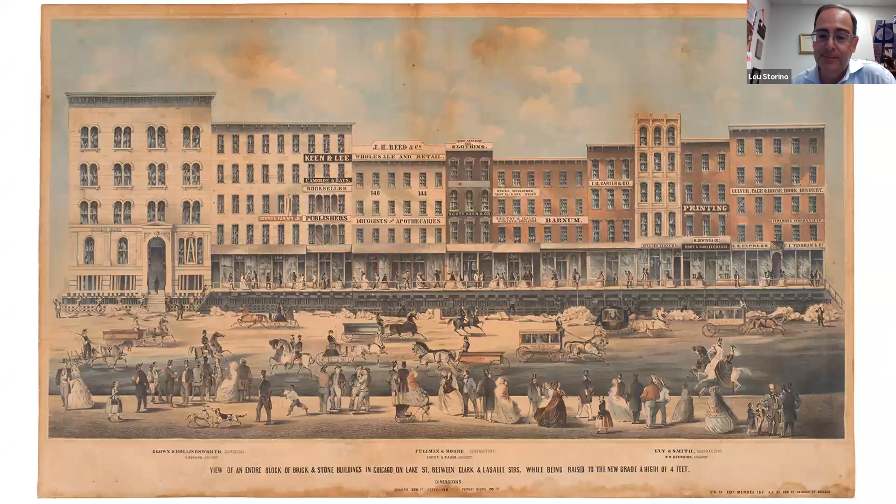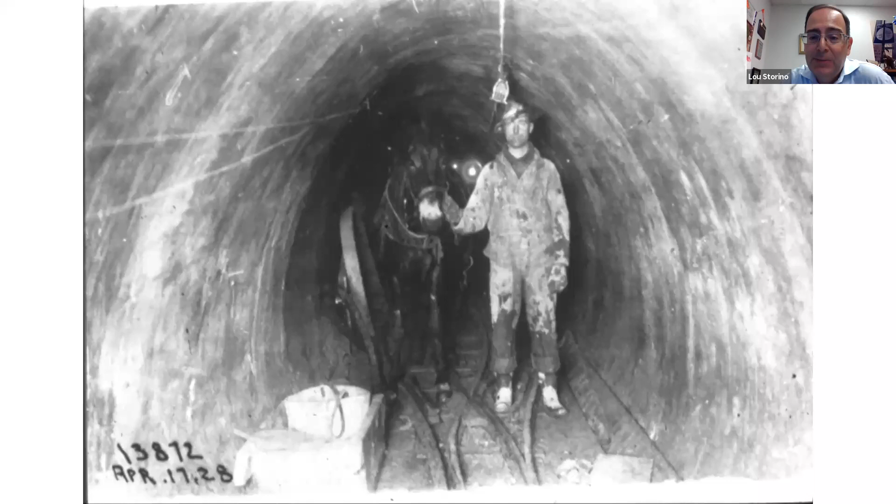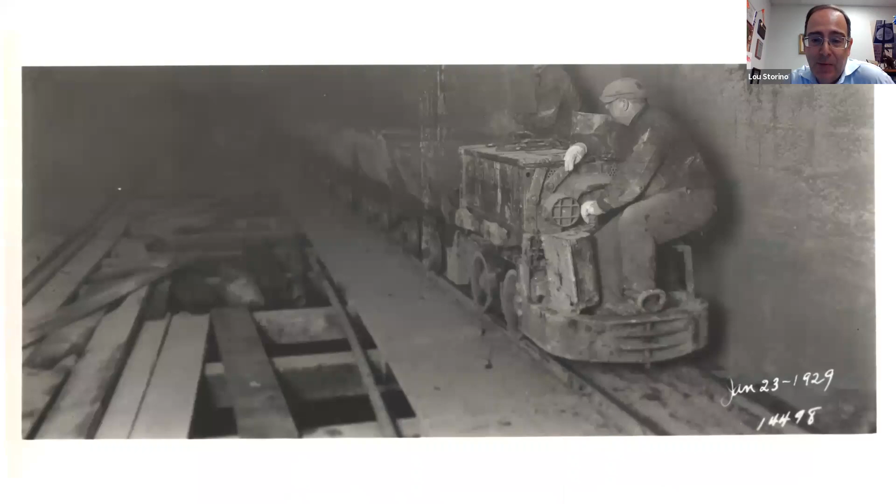Material was typically hauled in and out of sewers under construction by mule in 1928. If the sewers were larger in size, we show here battery operated rail used to remove construction debris. This slide takes us back to 1929.

Due to the nature of the soil, much of which was Chicago blue clay, the procedure required excavation by hand and the installation of ground support. The distance was only what could be mined out and lined with concrete within 24 hours. This involved setting reinforcement, placing the concrete invert, and pouring the walls and arch. A few days later, grouting began to fill any voids, and finally a thin concrete finish layer was placed on the invert.

And many of these sewers are still in useful service today. Sewer asset management is becoming more and more important in recent years due to economic considerations, since infrastructure maintenance and rehabilitation represent major investments in sewer systems.

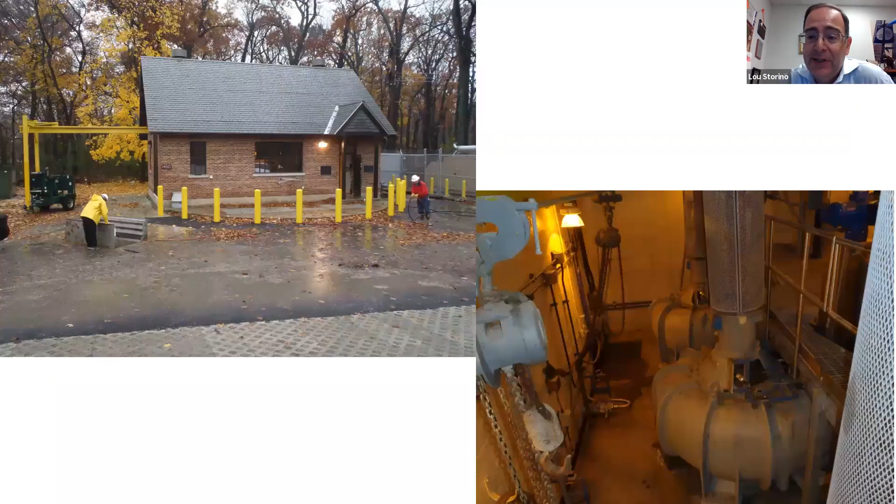As the water reclamation facilities were built in the area in the 1930s, intermediary lift stations were built along the collection system to lift wastewater, in some cases upwards of 40 feet or more, so that the wastewater could continue to flow by gravity to these new treatment plants. This photo shows the Upper Des Plaines pumping station in River Forest, Illinois, designed to blend in with the surrounding neighborhood and placed in service in 1938, and it continues to operate today. The station houses 3 centrifugal pumps with 38 total dynamic head and 350 horsepower motors.

Most water and wastewater facilities in the US are designed and built with large pumps, drives, motors, and other equipment that operate 24 hours a day. Energy costs can represent 25 to 30% of the total operation cost for wastewater and water utilities. Operational improvements allow for some of the greatest opportunities to improve energy efficiency at water and wastewater facilities. Energy efficiency can help lower the costs for water and wastewater utilities while improving the performance and service.

These sewer systems shown here in older communities in the Chicago area, and really across the United States, were built as combined sewers, carrying both sewage and stormwater runoff. Newer communities are built with separate sanitary and storm sewers. As these interceptors were placed into service, connections to the local waterways were left in place and structures built to allow for combined sewer overflow.

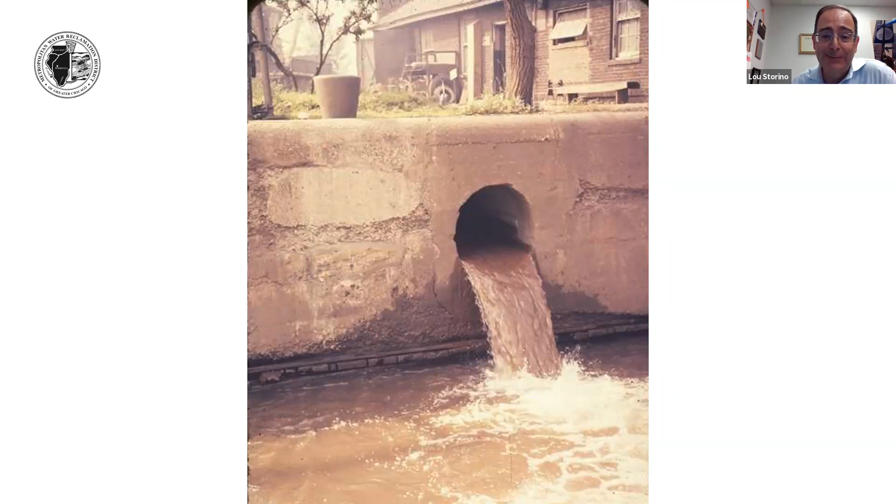During storm events, wet weather flow from local combined sewer systems is diverted into the district's tunnel system, also known as TARP. When the capacity of TARP is reached, combined sewage may discharge into local waterways, and this is something we really want to try and minimize.

We also have odors emanating from sewers that can be an issue on two fronts. One, it can be a public nuisance, and it can be indicative of high hydrogen sulfide, which may prematurely degrade the sewer system. This screenshot illustrates our district's tracking system, a GIS-based odor complaint tracking system. The small circles represent catch basins in the collection system, while the large brown circles represent odor complaints. There's a circle I've highlighted with the number 3 in it, signifying that in this particular location we have seen 3 odor complaints since 2014.

These odor complaints are investigated to determine the cause. Necessary remedy measures that are taken can include charcoal filters in the catch basin, cleaning the sewer system, or adding a deodorizing agent to the catch basin. If odors are persistent long-term, other measures are available to remedy the cause, such as introducing chemicals upstream.

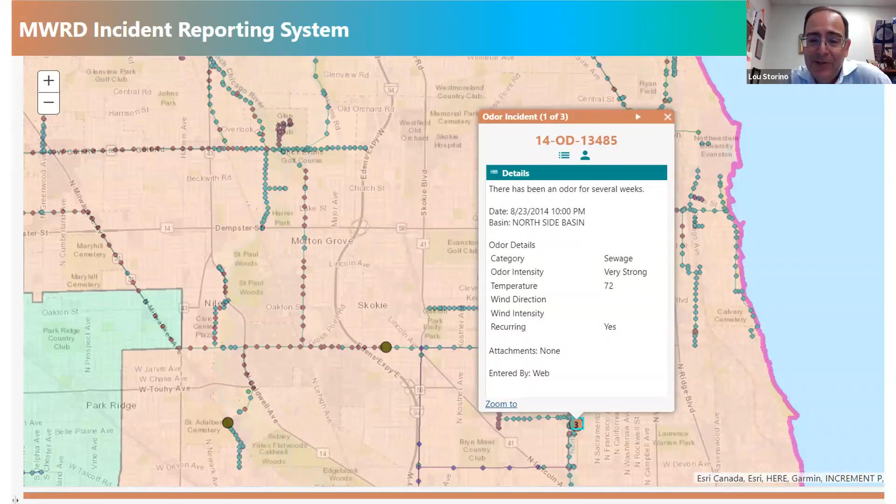Finally, on to our last slide. The innovators at today's webinar will paint a picture of how the future could look for sewer asset managers, and showcase some examples that have successfully helped Danish sewer asset managers avoid cost increases and extend the lifetime of these assets. The 4 key focus areas for today are digitalization of sewer systems and data-driven overview, predictive maintenance, pumps and efficient cleaning of the sewer system, and energy efficiency.

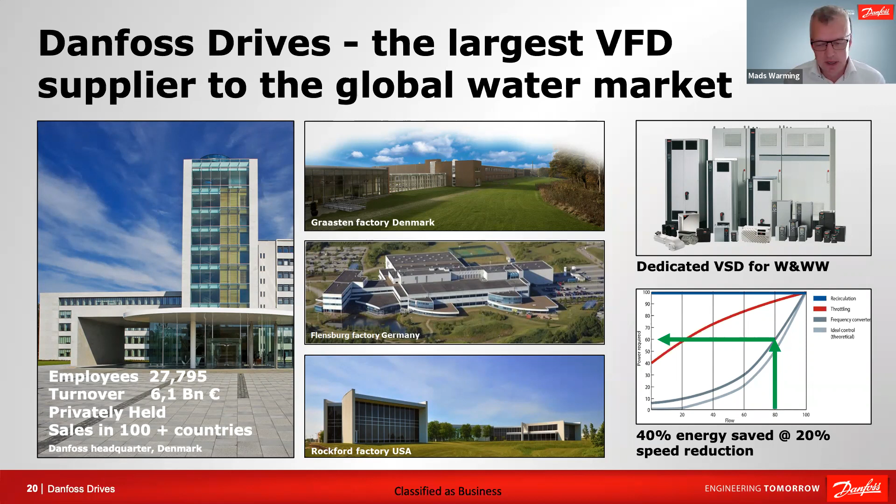In fact, there are new regulations set up from Brussels which push the authorities to find solutions so that we get less sewage overflow, and at the same time, as we all know, we get more and more heavy rain. So that's quite problematic, and quite a lot of money is being thrown into it.

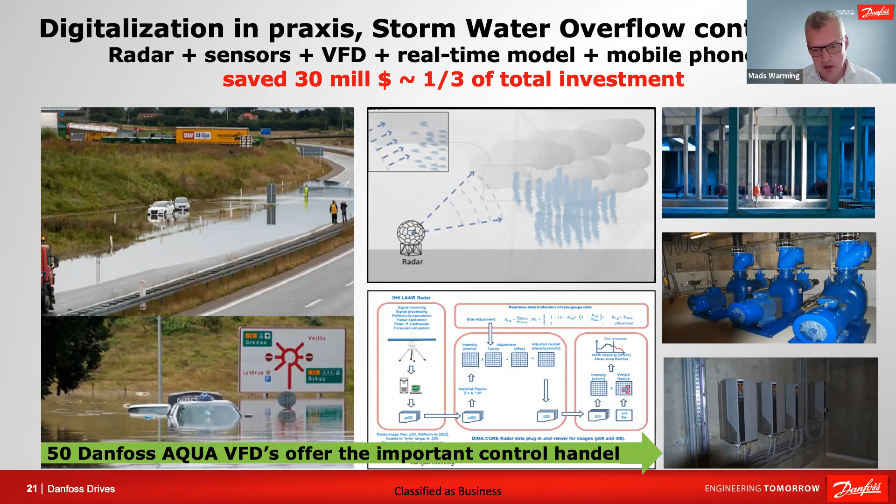There are 50 variable speed drives installed in part of the city to cope with that. The philosophy is that there will be a variable speed drive on every motor, whether in the network or in the reservoirs.

Coming to variable speed drives and how they can be used for more than just regulating speed, one thing we've introduced to the marketplace is edge computing. Instead of having a cloud connection, we don't need one here. We do all the calculations down in the drive itself.

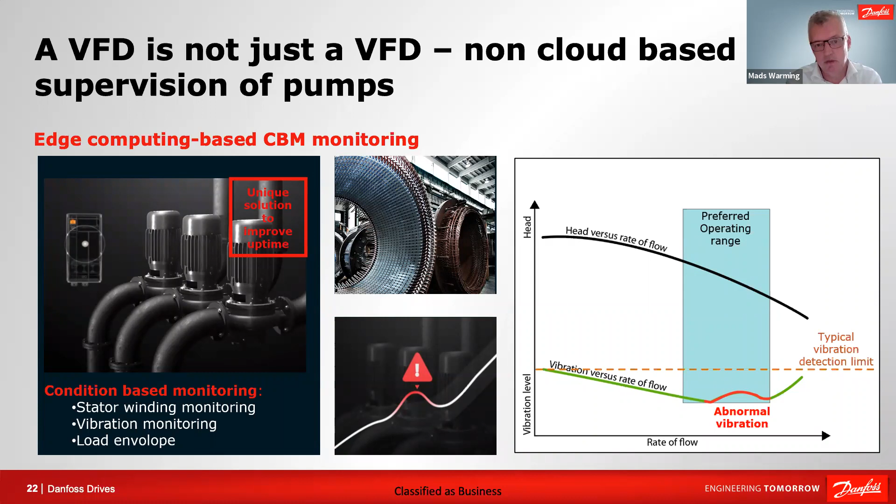What we're able to do is supervise the motors and the windings on the motors. We can have a vibration sensor connected directly to the drive, and we can create what we call a load envelope. This means the drive will learn over time how the load behaves at a given speed, and if that load deviates either high or low, a warning is given. Similarly with vibration monitoring, the drive will figure out what is the normal vibration for this pumping station, and if there's an abnormal situation, it will tell you something is potentially wrong with the application.

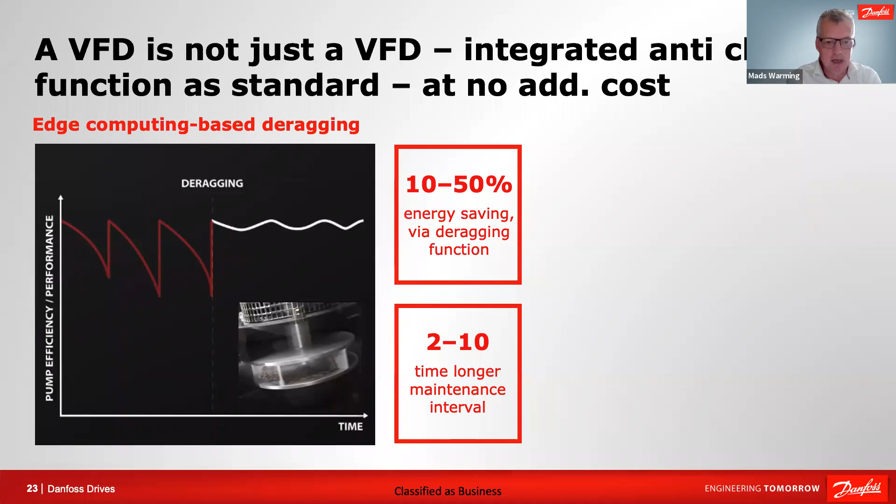Another point, especially in sewage collection systems, is that pumps can clog. There's no standard for how often they clog, since that depends on the wastewater. What's built in as standard in these dedicated drives is what we call deragging, or an anti-clogging function, which detects when the pump begins to clog. It then spins the wheel the opposite way to clean the pump.

This typically extends the maintenance interval by a factor of 2 to 10. What people forget about energy is that if you accept a clogging pump and go out every second month to clean it, the efficiency will drop and drop during those two months, then you clean it, it goes back to 100, and it drops again. If you let the drive do the work instead, as the white line shows, you keep your efficiency up the whole time.

We've seen energy savings from 10 to 50%, depending a lot on the application. The latest case, from Asia just two weeks ago, involved a pump that used to be taken out 22 times a year for cleaning. With this installed, they're now down to 2 times, not because it's needed but just for regular maintenance, with a return on investment of 4.5 months.

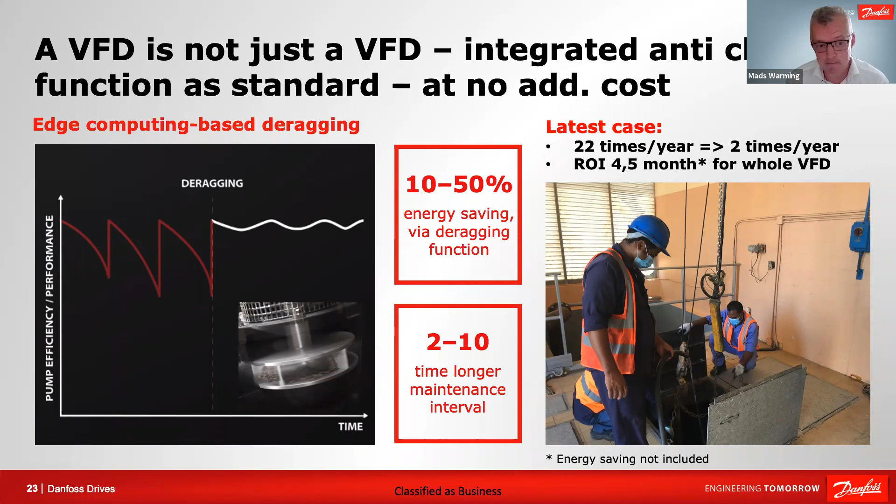Even though a lot of people think there's not much to do on energy in wastewater collection systems because it's a gravity system, there's actually a lot you can do, including a lot of digitalization, to really improve the system and save a lot of money. I think that was it.

Great, thanks so much, Mads. I just had a couple of questions.

Just to put this in context, if people are able to keep pumps from clogging, that's also reducing the downstream impact of things like combined sewer overflows that Lou mentioned, right? When we're thinking about releases, what's the correlation there?

I don't know if I can tell you in detail, but you're right that if you can keep your pumps running smoothly the whole time, the system is designed so you can decide if you want this anti-clogging once a day, or have the drive measure when it should be done. Both are possible, but it means you'll have much higher uptime on these pumps and be sure they're always running, to a much higher degree than otherwise, and for very little money compared to the issues you'd otherwise see. It's certainly something we see spreading a lot, because it's a very simple thing to do, but it really helps the maintenance crew so they don't have to run out as often.

Audience question: why was this configured as non-cloud monitoring? Why did you choose to keep it out of the cloud? Good question.

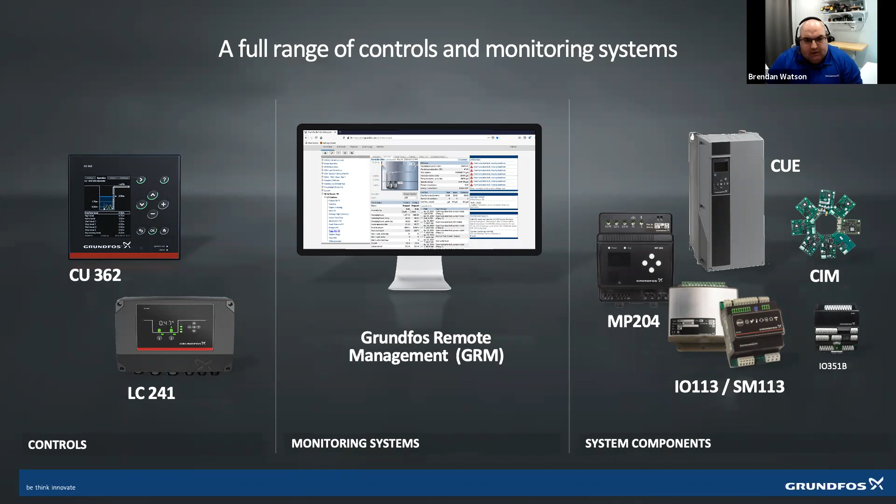Now, what most people know Grundfos for is our world-class pumps. We're a global supplier, actually the largest supplier of pumps in the world. But some things that people don't realize we have are our full line of controls and system components, as well as remote monitoring systems. Some of the topics discussed previously with Mads kind of fall in line with our controllers, which you see there on the left, which control pump stations and tell pumps when to run, but really getting into that key word, which is predictive maintenance, being able to see problems happen before they happen. We're going to talk a little bit about our components on the right and show some examples, but primarily what I'm going to focus on is our remote management system.

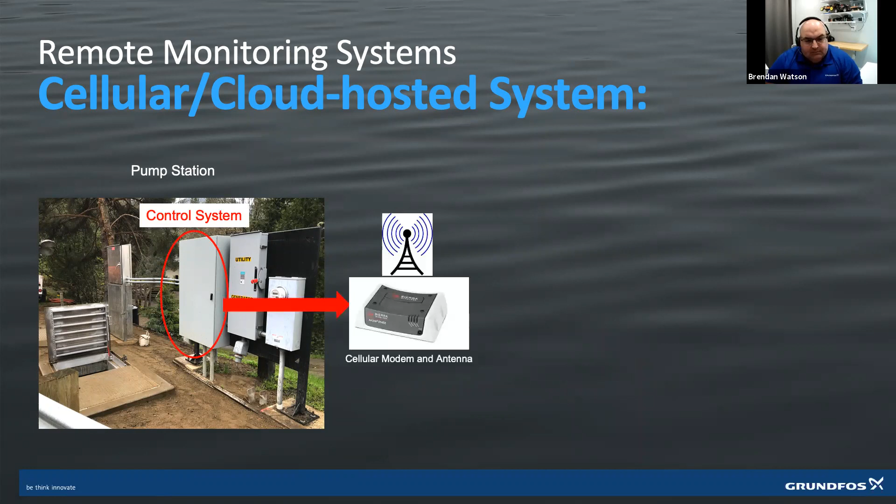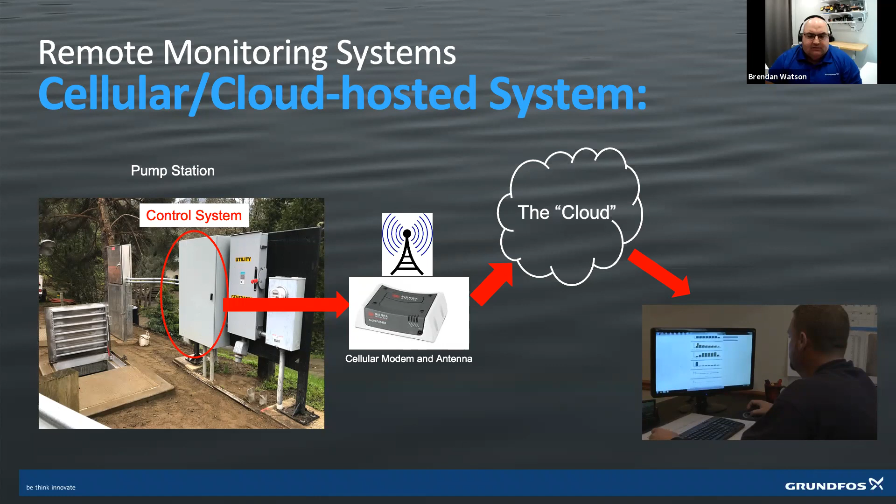So what is a remote monitoring system? We have a pump station there on the left, that could be a lift station or a stormwater station. We have our control system that talks through a cellular modem and antenna up to the cloud, and then allows a user to access their information over an internet connection or cell phone. Basically, it's an easy to implement, cloud-hosted system, typically based on a cellular connection. These systems are more prevalent now globally, which allows customers to remotely monitor their systems much easier than having to do the traditional radios, repeater towers, servers, and big software. This is kind of an out-of-the-box system.

Our solution here at Grundfos is something we call GRM, which stands for Grundfos Remote Management. This is our off-the-shelf cellular monitoring solution that can monitor virtually any pumping station or system. It allows easy access to data from your stations, pumps, and controllers, but we can also work with third-party equipment. So even if you're not using a Grundfos controlling system, let's say you have an Allen Bradley or Siemens PLC system, we can still monitor and report alarming and notifications from those systems. That's the final point, the alarming and notifications to operators and users, we send out text and email alerts. So if there's a problem at the station, the operators or users are notified.

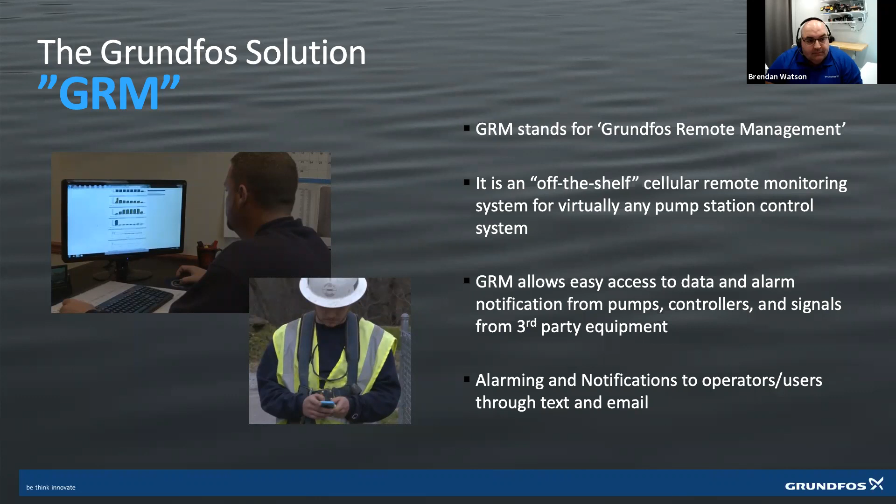So what's the information that you can get off of GRM? As I mentioned, it's cloud hosted. So once you install the equipment and you're passing data through the cloud, you have access to our servers, which are monitored 24/7.

Hit the next button, please.

Some other information that's collected, whether or not you have a flow meter. If you're using one of our controllers, it does flow calculation without the need for a flow meter. And if you're using it in conjunction with a power monitor or a VFD, as Mads talked about with Danfoss, we can pass that information into our control system. That gives you volume, but also specific energy, which is really an efficiency measure. There was a question about whether we can determine if a pump is going down, and your specific energy is going to tell you everything about the pump. Specific energy is how many gallons you're moving for every unit of power you're using, kind of like miles per gallon for your car.

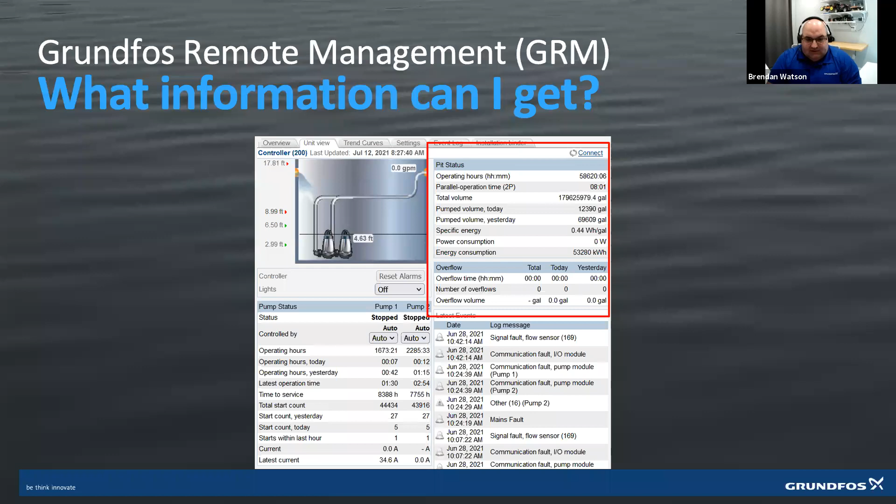What's interesting here is we looked at the average start duration, and this was just from running a signal from a contactor or a starter into that little black box. We found that pump 2 is running 48 minutes average, whereas pump 1 is only running 8 minutes. We went out there and actually investigated it. These were older pumps that had a manual flush valve, a little valve that you turned on and off, and somebody had left it on.

So it was every time pump 2 was running, it was just dumping water right back in the station. So even though the station was ultimately pumping out because pump 1 would do all the work, they were wasting tons of energy. Not to mention, if there was an issue where there was a large event, they couldn't pump it out.

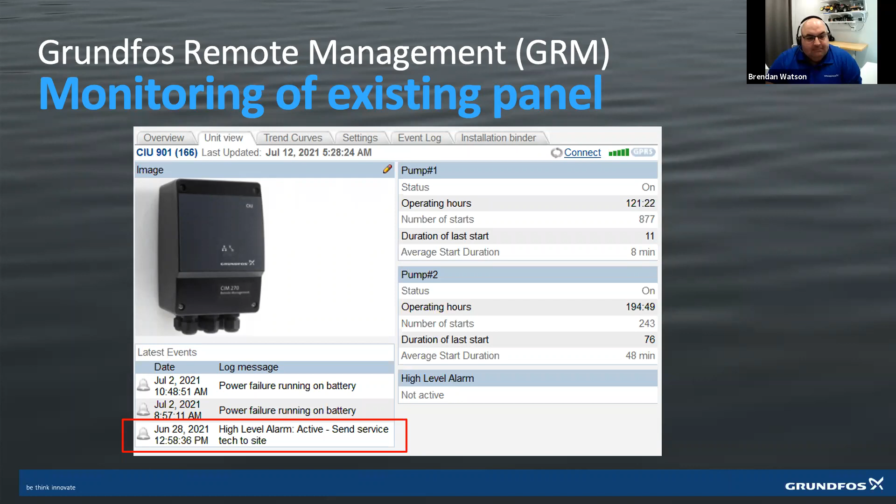It was only for a short period of time, but if you do that every single day, that current imbalance is cutting the life of their pump significantly. So a lot of the failures we see when we talk about predictive maintenance are often caused by the power. But how do we know that? We have to be able to monitor the incoming voltage and current.

Voltage and then current draw, that's what we can do with GRM as well. We do this a lot for customers, and it's really interesting to hear the feedback because most customers don't realize they've had imbalanced voltage coming into their station.

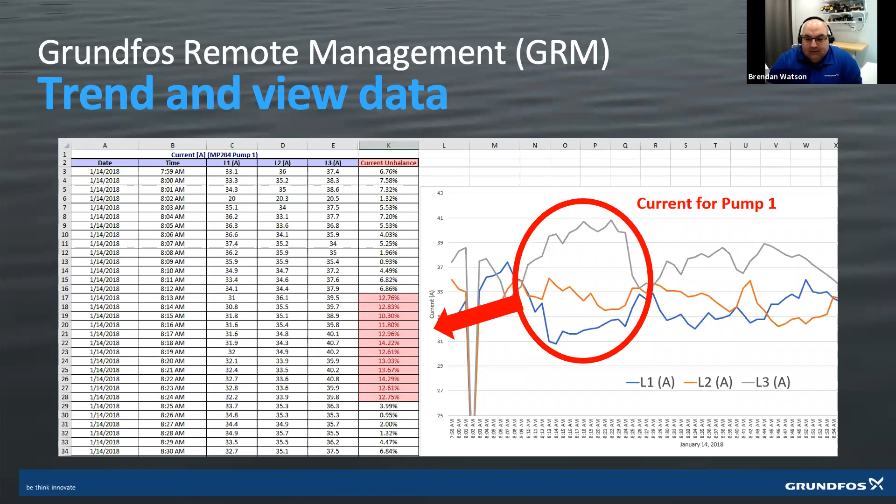Next slide, please. So why GRM? We're not the only ones out there that do a cellular monitoring system, there's actually a lot of companies out there. We're very easy to install and operate. We actually own our own software and servers, so we do soup to nuts for these type of systems on our own. We don't sub anything out, it's all internal to Grundfos.

Here's the big kicker, this is where we're different. We actually have two-way control with our cellular monitoring system. Most systems out there just monitor for high-level alarms and things like that I showed you, but we actually have the ability to manually control pumps and other equipment remotely. So from your phone, you could turn a pump off if it became an issue and you didn't want to, if you had somebody that was 30 minutes or an hour away.

You could change settings on a controller without having to physically go to the site and do it. We can actually do things that help eliminate spills through GRM, where we can shut certain lift station applications down so they become holding tanks essentially. So that's one of the things that makes us very unique, that we allow two-way control, not just monitoring.

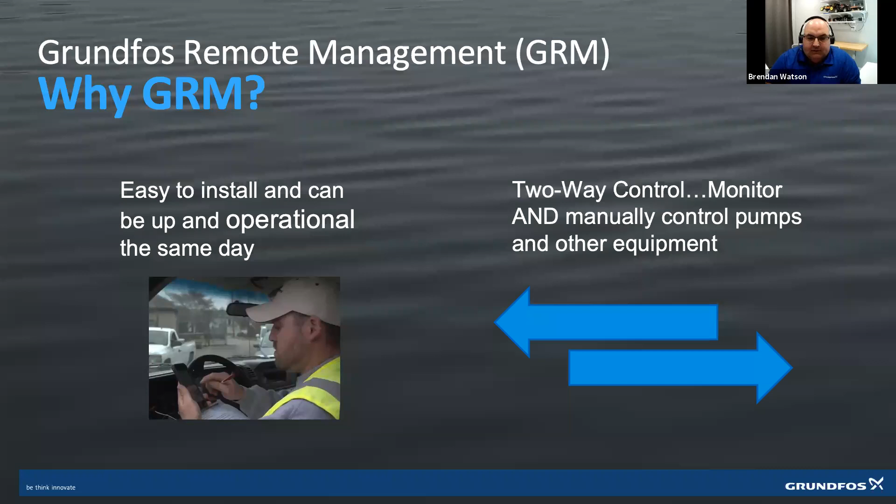One of the presentations I've done there is called Power Quality in Pumps: Is power killing your pumps? I explain what voltage imbalance is, why it's there, and how it affects your pumps, in layman's terms. If you're not familiar with that issue, I'd recommend watching that presentation on our Grundfos Technical Institute, because in my opinion it's very eye-opening, since it's something we tend to overlook a lot.

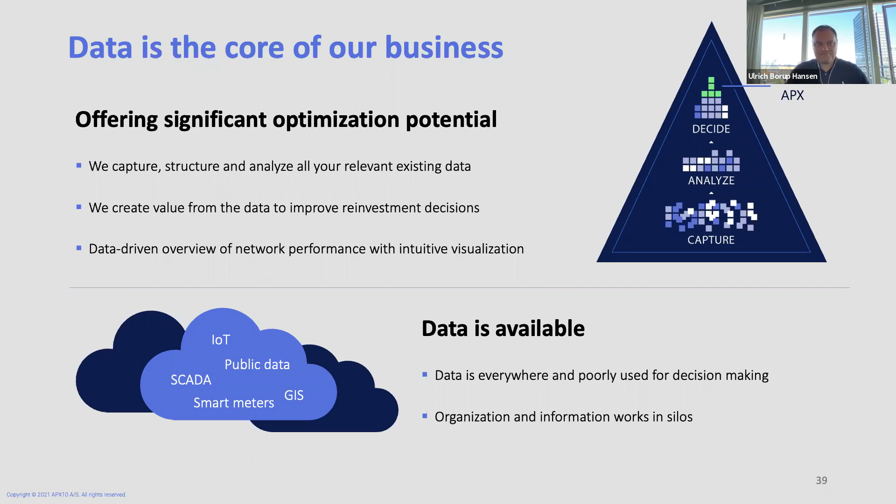Our solution, the Data Apex, is not your conventional add-on used in, for example, whatever existing GIS system you have today. It's instead a deliberate, structured approach to decision-making, which makes it easy, accessible, and intuitive. This applies both to management and specialists within utilities. We want to make sewer reinvestment easy and understandable, but at the same time include many more variables in the equation than previously used when making these decisions. That's kind of tricky, but data now enables water utilities to reach the apex mentioned before.

By combining analysis related to very specific utility problems, such as the overflow problems we just discussed, it could be inflow and infiltration issues as well, and hydrogen sulfide—we're able to combine that with a more classical asset management context, focusing on condition assessment, where through likelihood of failure we use machine learning, as well as an AI-based consequence of failure analysis, where we focus on the impact for ratepayers, businesses, and general infrastructure.

Adding all of these elements of a broader utility overview will allow all the assets to be capitalized with relative reinvestment costs, which we can add, and also, if available, accounting values. This will give you a thorough data quality analysis in the end, which enables this apex to be reached, simply combining all the sets of data just mentioned before.

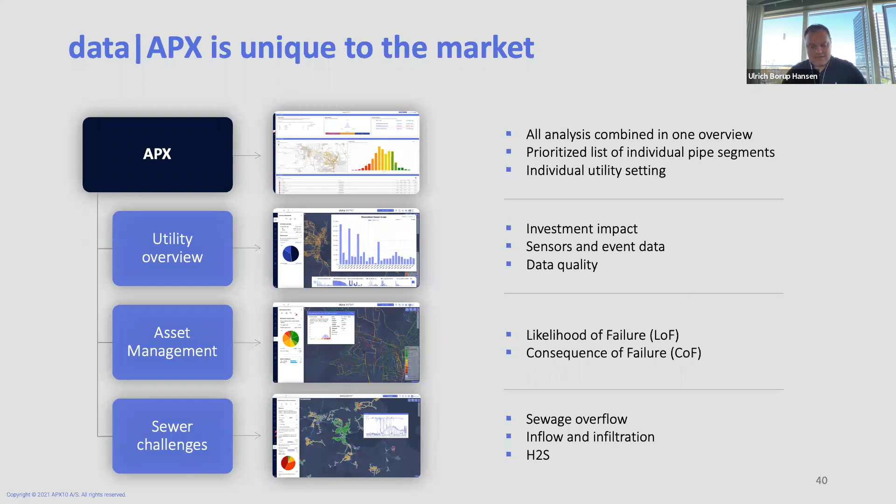Implementing and using a platform like data|APX is actually easier than you might think. It's fast, since data is already present, and that's key here. There's no need for external consultants to be involved in a project like this.

It's important to understand that this is not a matter of making asset management and data-driven decisions into complex IT projects, but respecting that you can start where you are, at your current level, with the current data you actually have in front of you. It involves only limited internal utility resources, as the setup is a matter of access to the data.

We actually take it from there, where the data processing is done on the platform. Hence, you as a water utility should focus on using the value created and onboarding the organization in becoming more data-driven. This is where the real hard work lies — converting all these findings into changing the way that you operate going forward.

So my comment is that you're actually already good to go as you are. As a utility, you have a lot of available and relevant data today. Unnecessary investments in new sensors and hardware is something we believe should be avoided, as we can integrate and bridge whatever kind of data point is available today. Not meaning that sensors and hardware going forward are irrelevant, but you actually have what it takes to begin to operate with data and strategic asset management already.

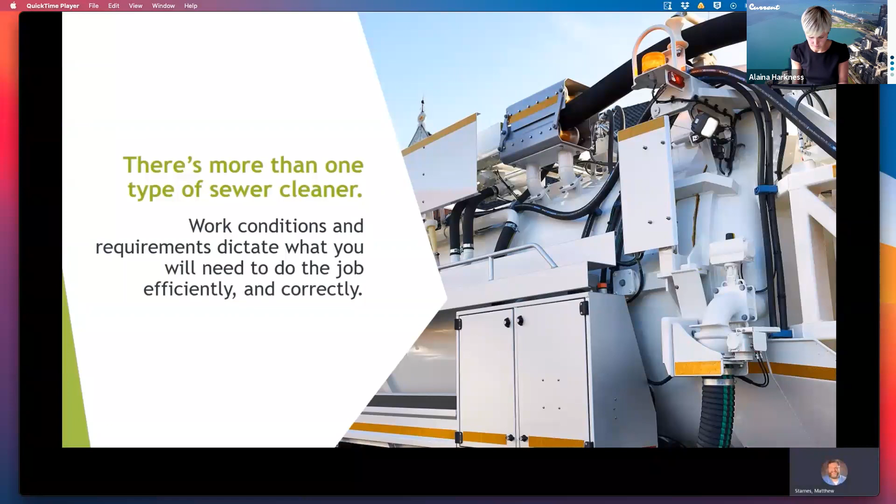Really, there's more than one type of sewer cleaner solution when we talk about these. It really comes down to your application, what you need the machine to do efficiently and correctly.

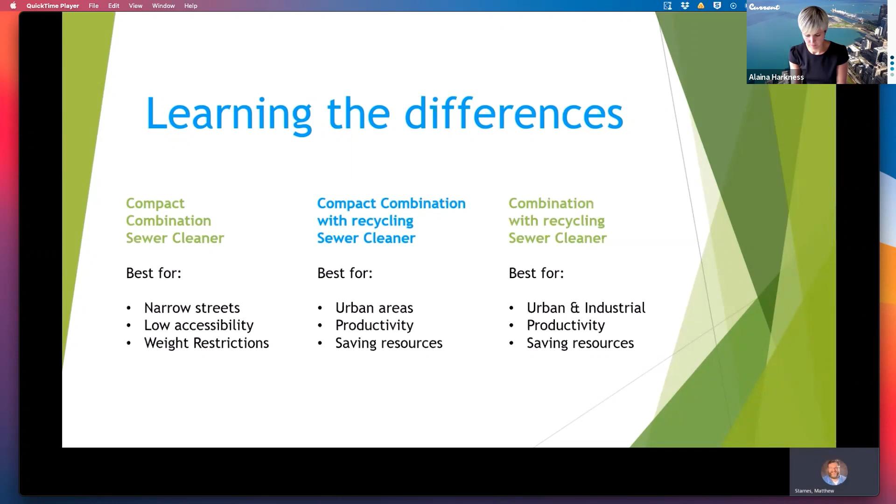In our solutions, we have compact combination, compact combination with recycling, and combination with recycling. The differences are: the compact combination sewer cleaner, at a high level, is best for narrow streets, low accessibility, and weight restrictions; the compact combination with recycling sewer cleaner is best for urban areas, productivity, and saving resources; and finally the much larger combination with recycling sewer cleaner is best for urban and industrial applications, giving you a productivity boost and resource savings as well.

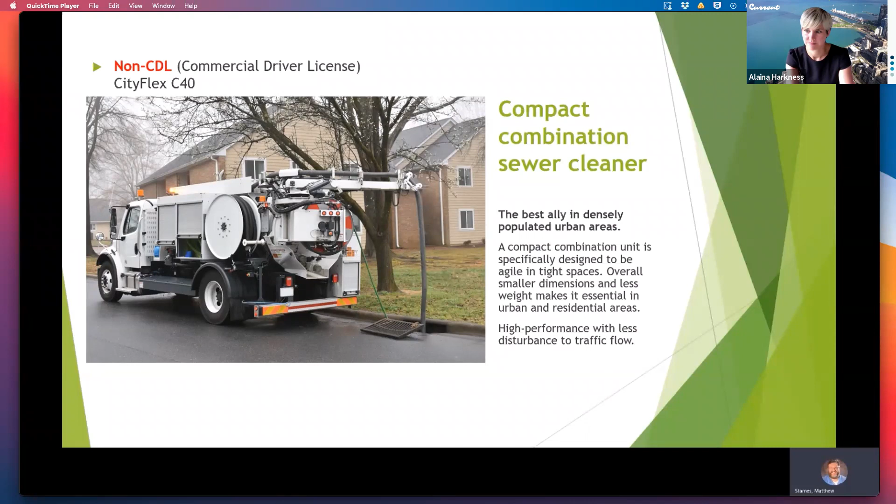The compact combination with recycling sewer cleaner, the Recycler CR60, is really the best of both worlds because you get that compact combination with the recycling system. So you can work in those urban residential areas, but the noise level is really low and you don't have to refill water or disturb traffic.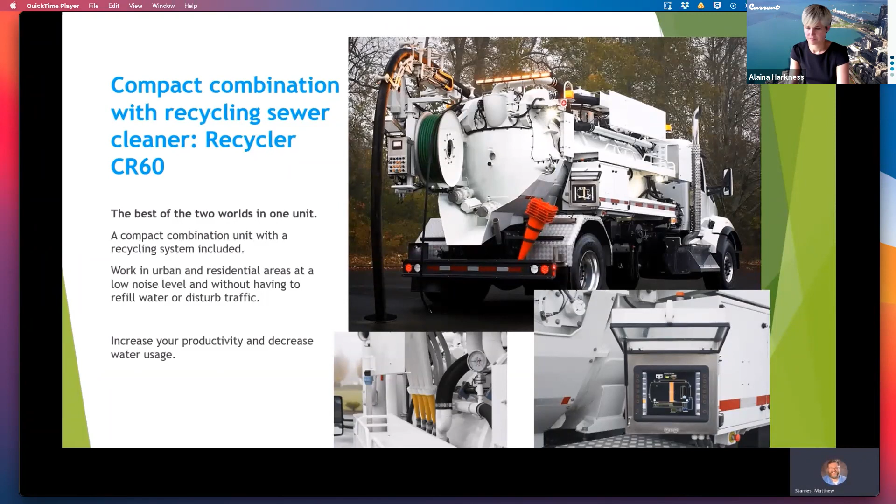Now, as I call it, the Recycler CR120 is the big beast. It's a souped-up combination with recycling sewer cleaner, and really the best option for productivity and to save a lot of water.

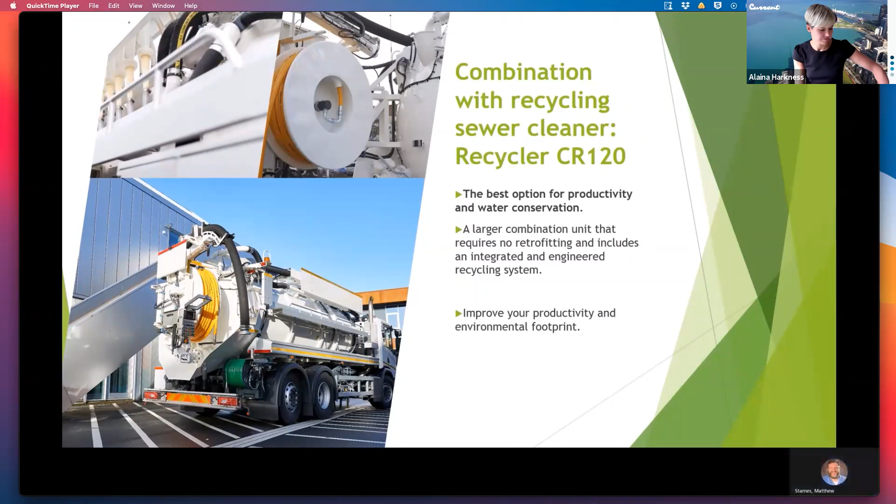And some sewer water tanker recycling benefits. As we've stated before, you don't need to fill up with potable water in order to work. It's really almost like having a portable water treatment plant right there in your vehicle.

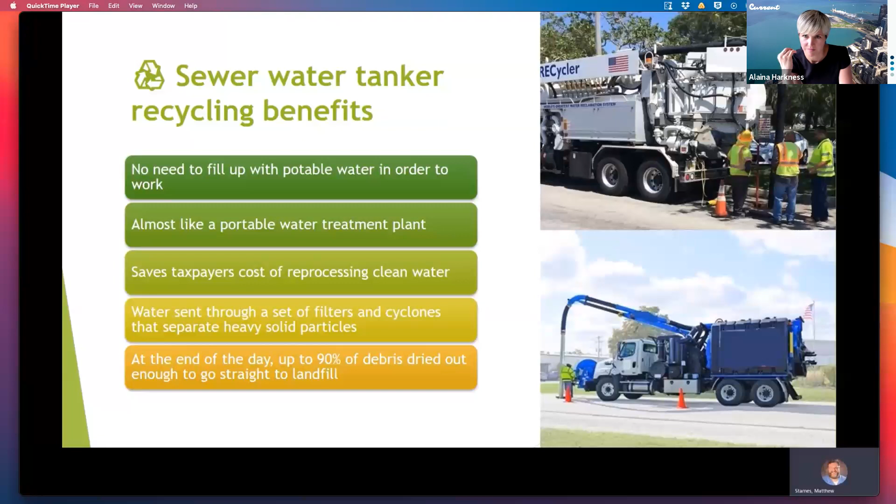Just going to show a couple shots here. This is the recycler and the hose going through a manhole. And then here's an under-the-street view, if you will. That's sludge that the hose and the nozzle are breaking up.

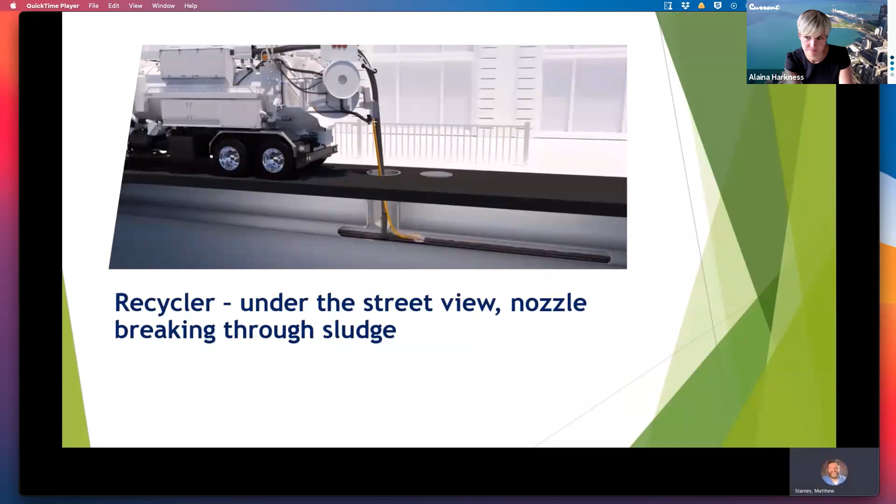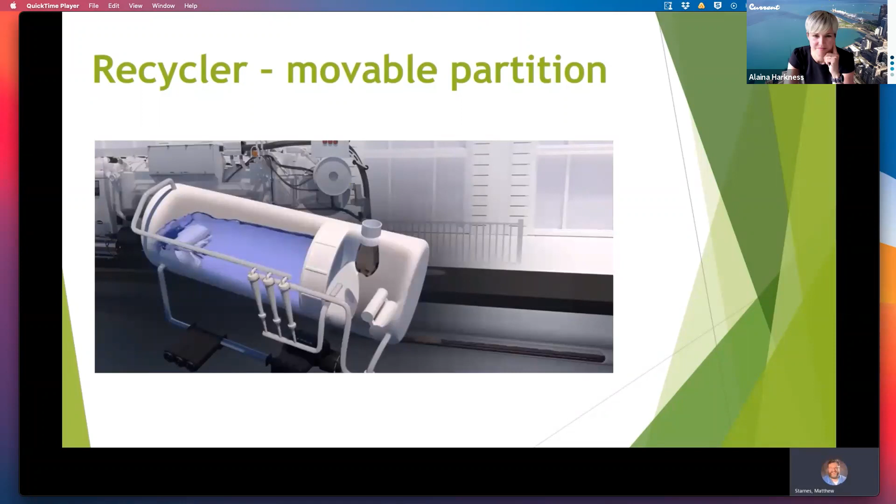Taking an inside look at our movable partition, you see on the left side there, that's our clean water. On the right side, it looks like a drop there—that's the sludge that's incoming, so it's sucking that in. Then you can see the partition has moved where you have less water over there that's being recycled, and then you have the sludge that you're breaking up being collected so you can later dump that into an appropriate disposal landfill.

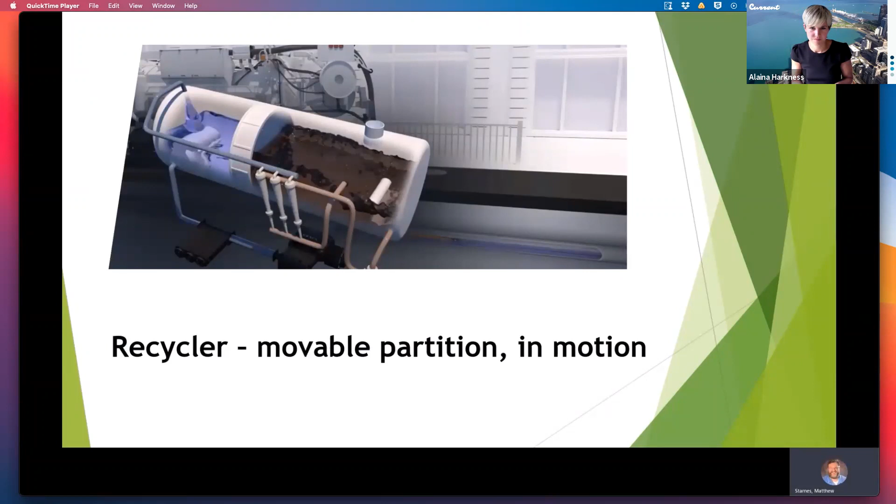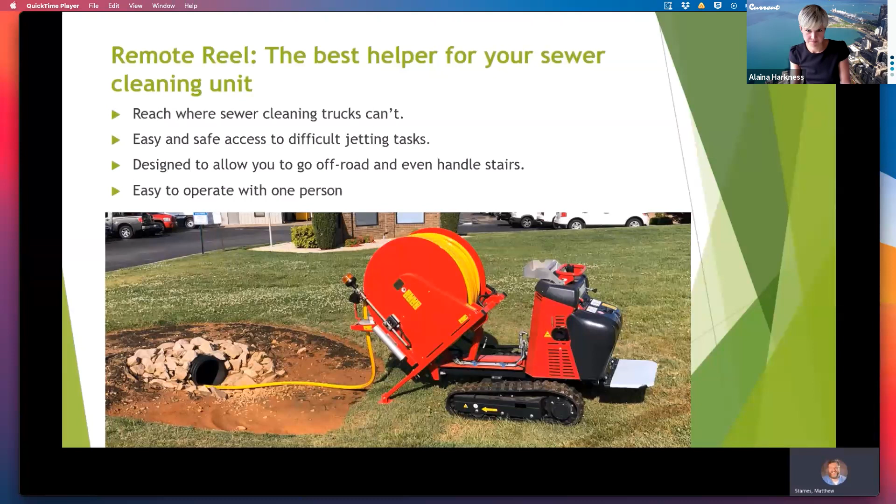Just want to mention also our remote reel. It's the best helper for your sewer cleaning unit. It's a little accessory that can work with any kind of sewer cleaning truck, which is really great. You can get into fields, go downstairs, up and down stairs, into parking garages—those hard to reach places. So that's another accessory we have in the sewer cleaning solution department.

So we've heard a lot about some pretty high tech and very nice solutions. I'm going to take it down a little bit on the more practical level here, into the actual soup, so to speak—talking a little bit about chopper pumps for lift stations. Next slide, please.

As many of you are probably aware, Elena introduced a little article from Los Angeles where they had some issues just recently. This is a pretty common phenomenon around the world, in that sewage is really no longer just sewage. We're all familiar with the very large amounts of flushable wipes, grease, plastics, and all the nasty stuff that goes into sewers, and at best will build up a scum layer, or in worst case can be massive fatbergs.

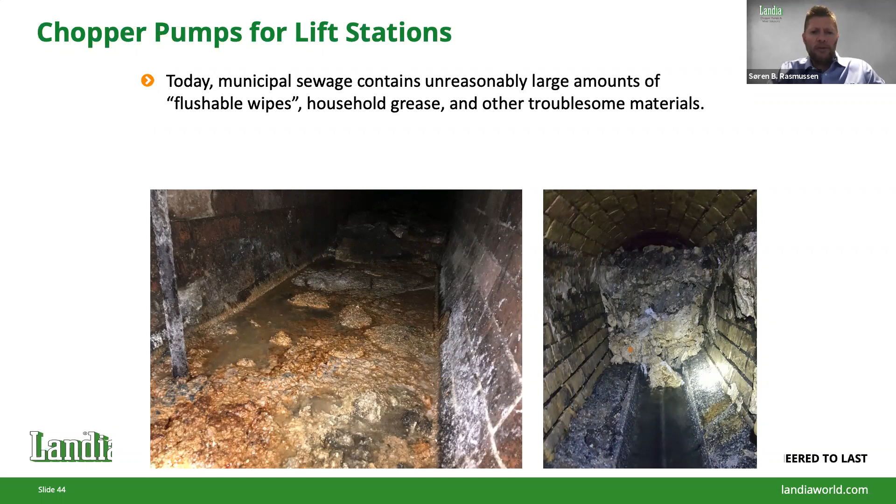This has obviously not gotten any less here in the COVID times, with increased use of sanitary wipes and face masks. So those of you in the wastewater industry are familiar with these pictures of how things can really just clog up the pumps. It's also creating not just headaches and very expensive repairs, but also odors. Lou mentioned it from Chicago, where some of the sewage stations can build up a lot of hydrogen sulfide and stink up the neighborhood.

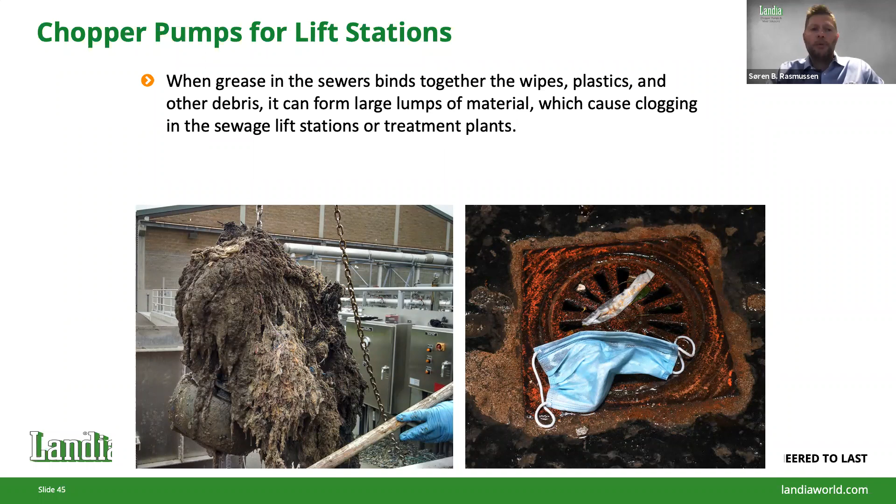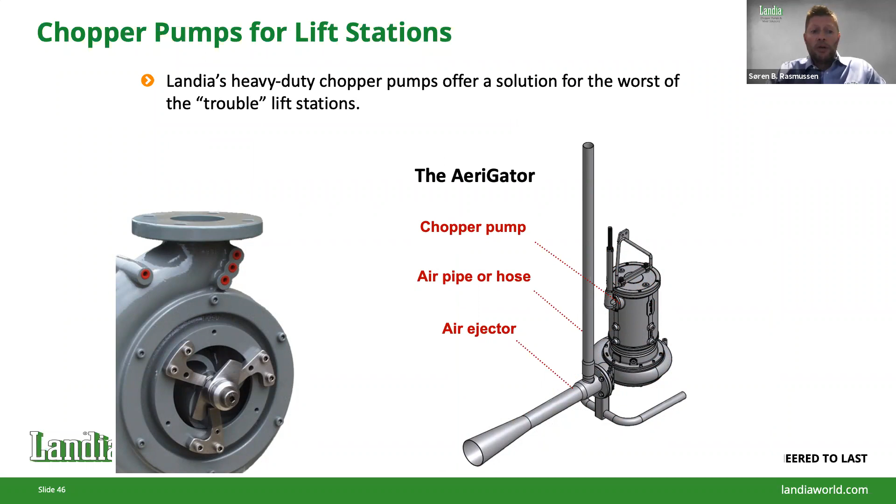So Landia's approach to that is fairly simple. We have a heavy-duty chopper pump, which, as many people may not know, Landia actually invented the chopper pump some 70 years ago. It's been around a long time, but in recent years we've seen a bigger need for it in the sewage collection system. So we came out with our AeriGator series, which is the image you should see on the screen - a submersible chopper pump.

It's equipped with a Venturi nozzle that, when we pump sewage through it, creates a vacuum, and then we have an air pipe or air hose that can pull air down just from the atmosphere. It doesn't need a compressor or any other air source - it aspirates the air down. The chopper pump has a hardened steel knife system that basically just chews up all the solids in the wastewater - the wipes, the rags, and so forth.

Then we take this AeriGator, basically just dump it into the sewage wet well, and it sits there and recirculates, chews up all the debris, recirculates the wastewater, injects fresh air, and effectively just cleans out the station while keeping it odor free.

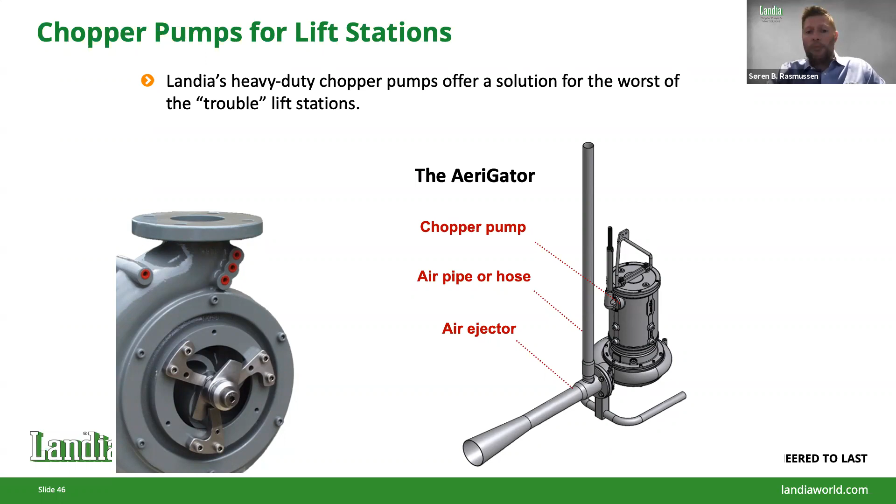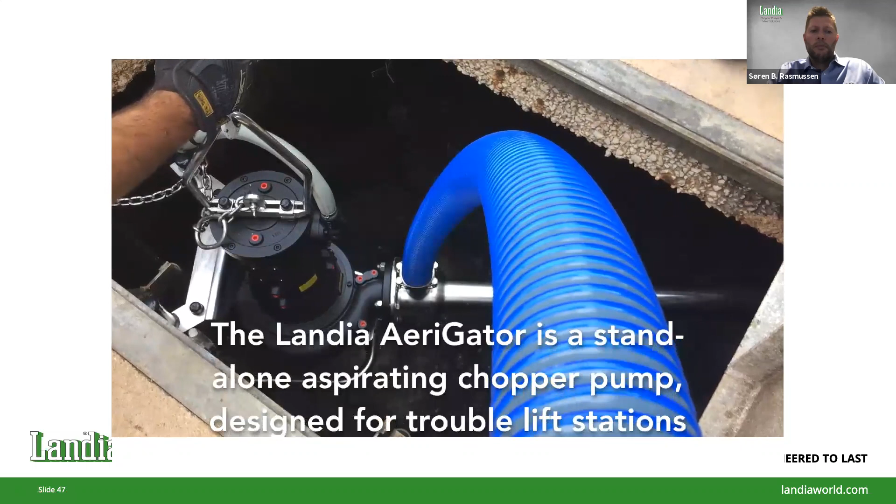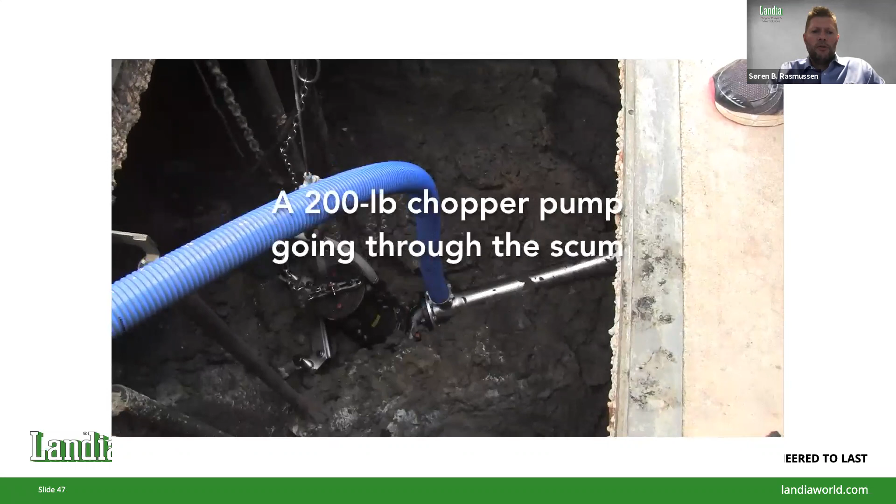So this is a little video that shows that AeriGator in action. As you can see there, this particular station had quite a scum layer. It took a little while to get the pump through.

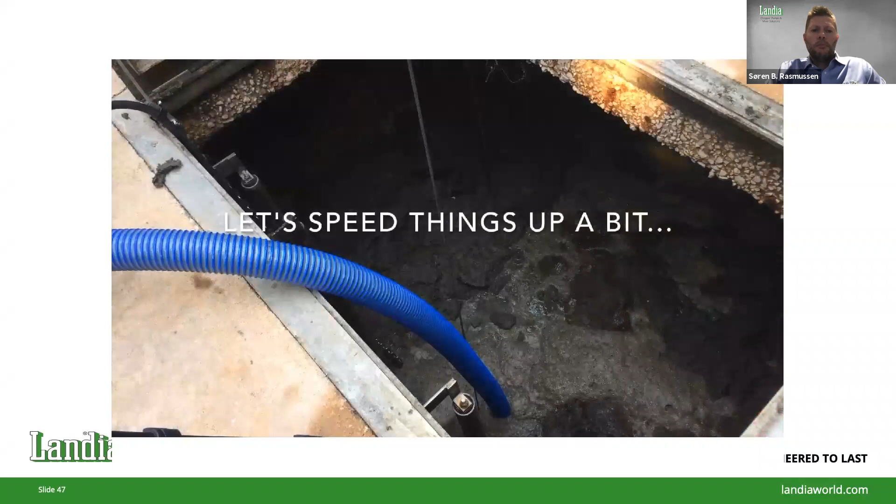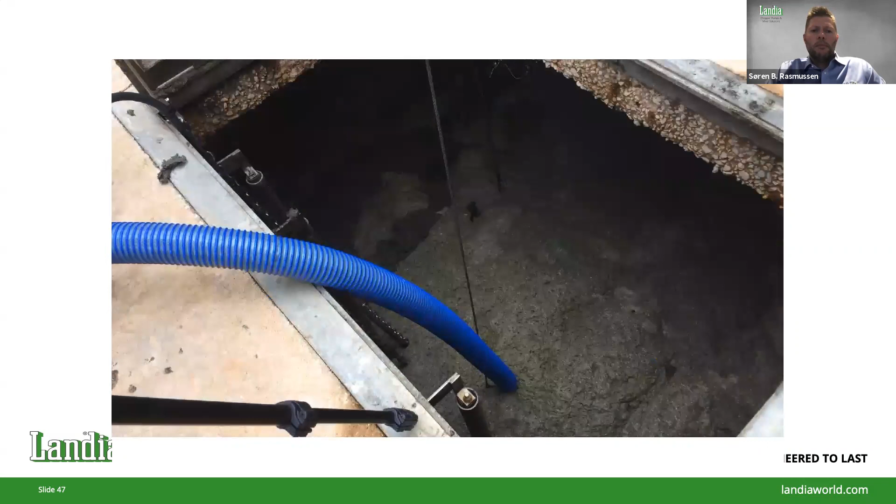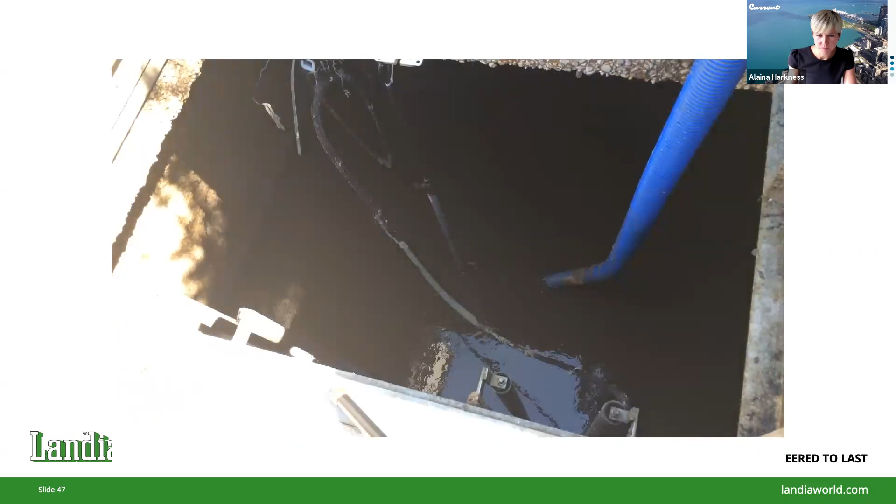Is the foaming the biological activity you're talking about? Yes, exactly - there was a lot of built up biomass in this station. But as you can see in this image here, now it's a perfectly clean lift station. And once we get to that point, you really only have to run it a few minutes a day to keep it at that stage.

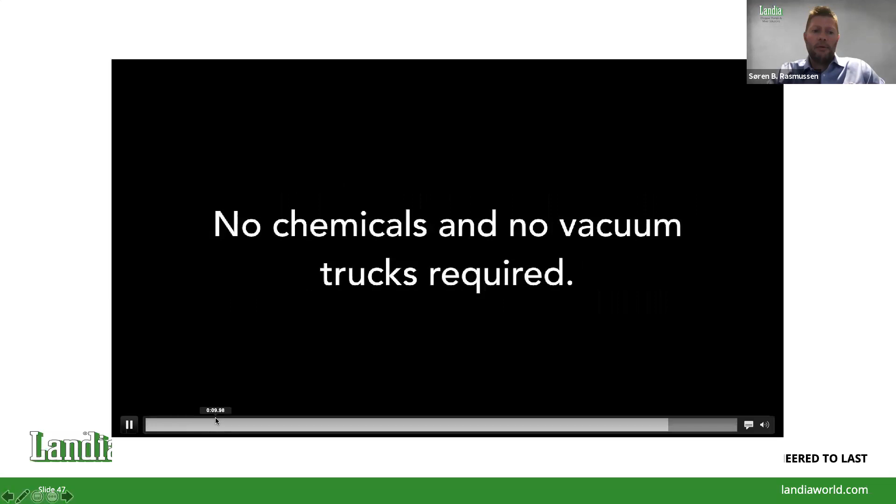So we're not dumping any chemicals in, we're not pumping any - we don't need a vacuum truck to come out and clean out the station per se. We just chew everything up and keep it recirculated within the station while keeping it fresh.

And these Gator units are available for rent. We keep them in North Carolina at our facility there. So if you have a very nasty lift station, we're happy to send you one of these - you can test it out, see how it works for you.

And that's kind of where we come in - in situations where regular sewage pumps cannot handle the sewage is typically where we come in. So the Gator series is a standalone, drop-in unit. We don't necessarily replace the existing sewage pumps. In most cases, after we've macerated all the debris and gotten it all mixed up, the sewage pumps can typically handle what is fed to them.